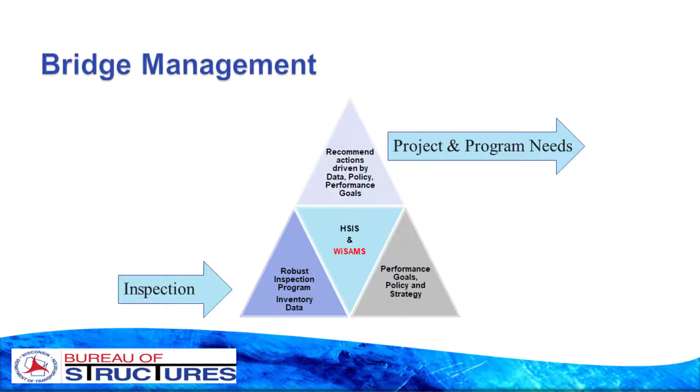Using the tools in-house, we have what we refer to as Highway Structure Information System, which is an in-house data management system we built to maintain our inspection data. It's also web-driven and interactive with our inspectors, so they can upload information during the inspections in the field. We also developed our Wisconsin Asset Management, WISAMS, to utilize that information and use it to forecast needs.

Ultimately, the goal is recommended actions driven by data and policy. So big picture is good inspection information yielding projects and program needs out of that program.

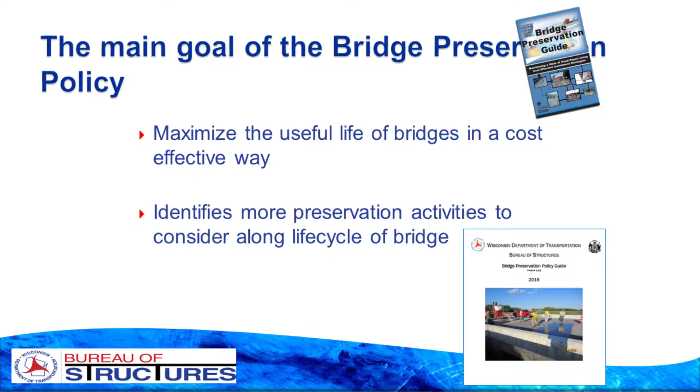Bridge preservation really is out to maximize the useful service life of bridges in a cost-effective way. One of our goals was to identify more preservation activities to be considered along the life cycle of that bridge, just not wait until we had a replacement issue.

In developing our policy, we utilized the Federal Highway Bridge Preservation Guide, but we also undertook a study and did elicitation of experts, both our internal experts, our bridge inspection engineers, as well as nationally. We did some outreach to many of you to talk about your concepts, and we brought that together into our bridge preservation guide.

So the main goals in the preservation policy are really applying the right treatments at the right time, optimal and consistent treatments driven by conditions and time. We wanted to create preservation-specific objectives and measures and identify preservation activities, the eligibility and needs to meet those objectives.

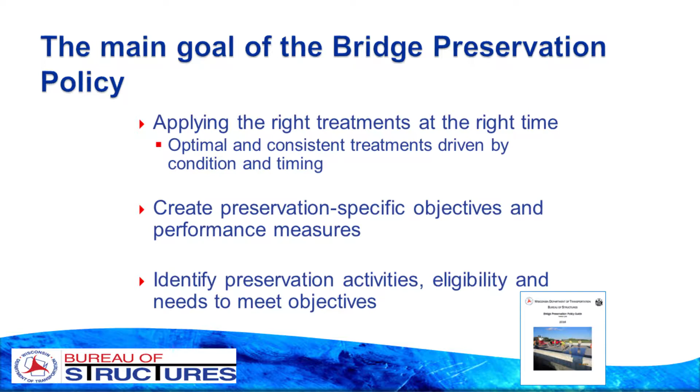As far as objectives and measures, in that policy we set out a number of goals and targets that we wanted to meet. The big global ones are to maintain our state bridges, 95% of them, in good and fair condition, as well as the decks.

Those goals also go down to the paint systems and the joints and other components of the structure, but those are the big ones that we shoot for.

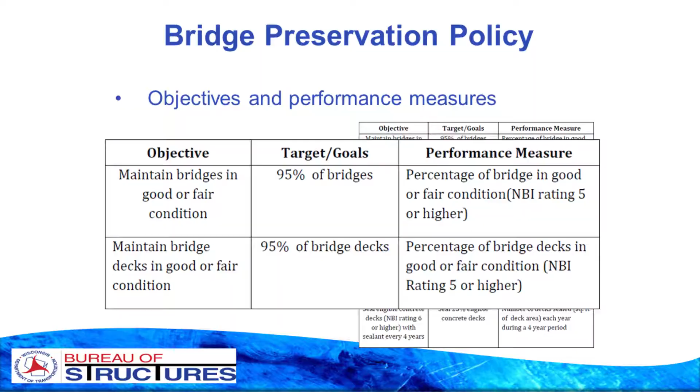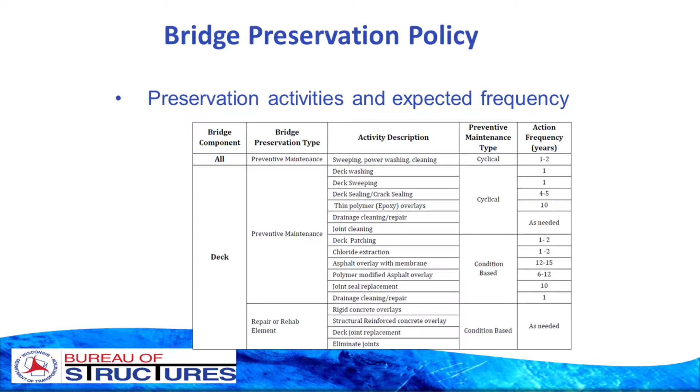Within the preservation policy, we have indicated activities and expected frequencies, and those are both cyclical and condition-based, and progressive in nature. We've got a number of tables that outline it, and it also talks about the application frequency or the anticipated frequency for those activities.

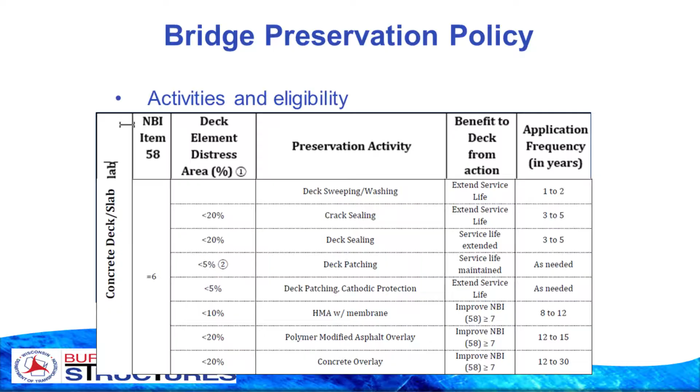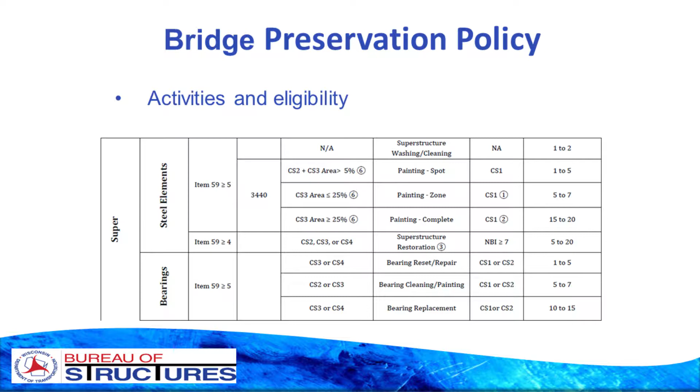We also get into the eligibility for those activities. We've all been collecting NBI information for quite a few years, and recently in 2015 started collecting the new element information. We've been collecting core element information for quite some time, I think more than 15 years. So our criteria are kind of a mix and match between NBI and element level.

We talk about the benefits of doing some of these actions, not just the criteria to do them, but the benefits and the application frequencies anticipated. And it goes through the super, sub, and the deck, super and sub.

We also get into a number of the other components, including bearings and painted systems or painted components in there, and we speak to the improvement to the element also anticipated from those actions.

So we've got an understanding now of what some of these activities might be and how to identify them. To us, the proof's kind of in the pudding as far as getting them into the program. And to get them into the program, we want to make sure that they're fundable.

Our next step in developing this preservation-based program was to revisit our Wisconsin DOT Federal Highway Preventative Maintenance Agreement. I believe all the states basically have a similar document to this. In 2016, we worked with our division office and made some updates to that agreement.

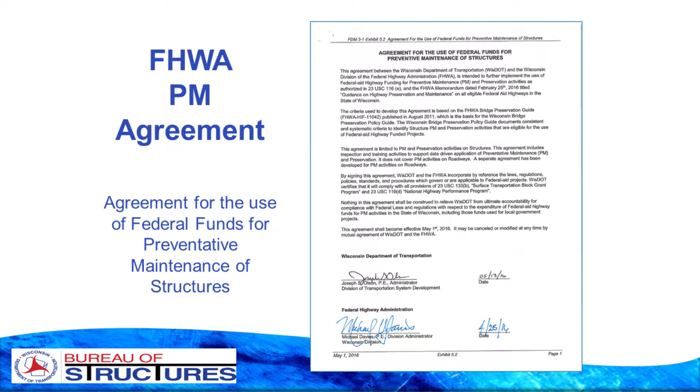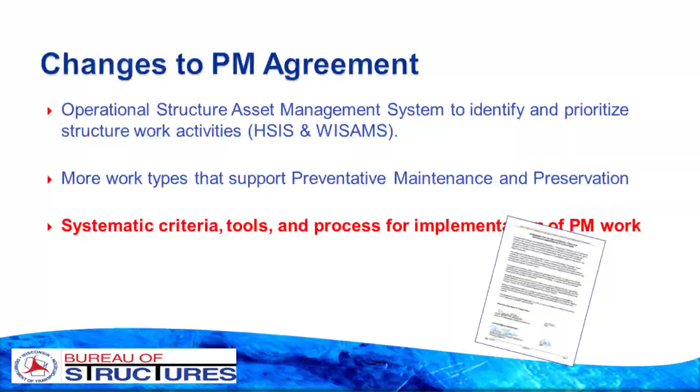The agreement now reflects the fact that we have an operational asset management system to identify and prioritize these various work activities. We documented more work types that support preventative maintenance and preservation as being fundable with federal dollars, and we really drove home the point that we have systematic criteria, tools, and process to implement this PM work.

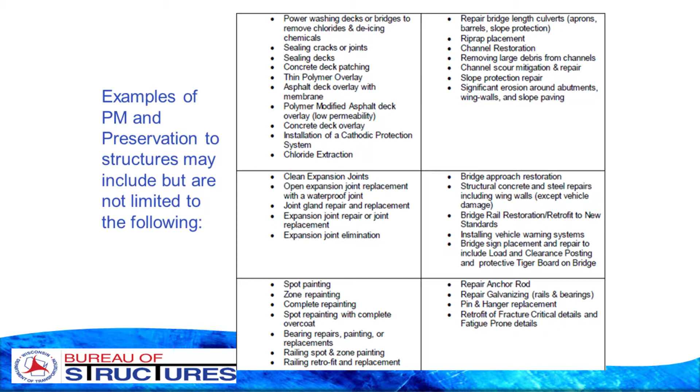Some of the work types within that agreement relate to the deck, various deck treatments, whether overlay, sealing, chloride extraction, things of that nature. Also joints, painting, spot painting, zone painting, and items dealing with the channel, the approaches, and other components on the structure.

These are not meant to be exclusive, but reflective of the work types that we've agreed with our division office in Wisconsin that are eligible for funding with federal dollars.

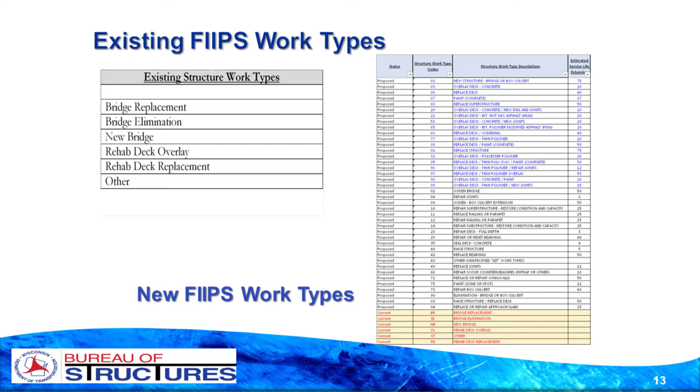The next step was to get them into our program. Historically in Wisconsin, when we identify and program work, these were the areas that we would identify for programming bridge funds, and they're quite limited. The other category here would be kind of a catch-all for a lot of stuff, so not very granular, not very descriptive of the various types of work we could actually do.

Extracting from the preservation policy and again working with our planning people and our regional bridge maintenance engineers, we came up with a much more granular, descriptive set of work activities that we would like to program, identify with our systems, and then program into our 6-year program of work.

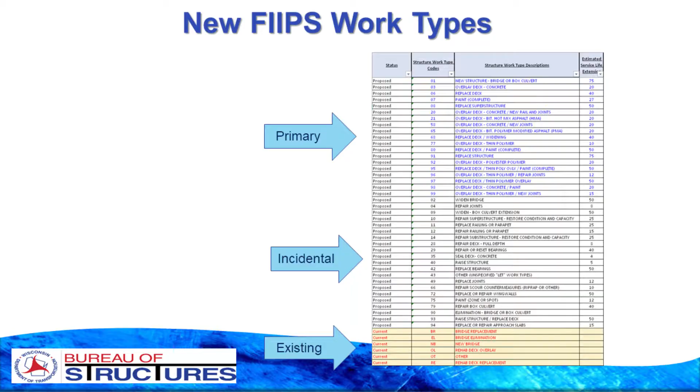We've got primary work types, which is everything from thin overlays to overlays in combination with joints or bearings and things of that nature, to deck replacements, to full bridge replacements, and other major work.

We've got incidental work items now, which on an individual basis would not necessitate a project, but are really good things to identify when you are programming a project.

And then our legacy items, in that we weren't going to wipe away our current 6-year program that's already in the process of being delivered. So we still had to recognize those legacy items.

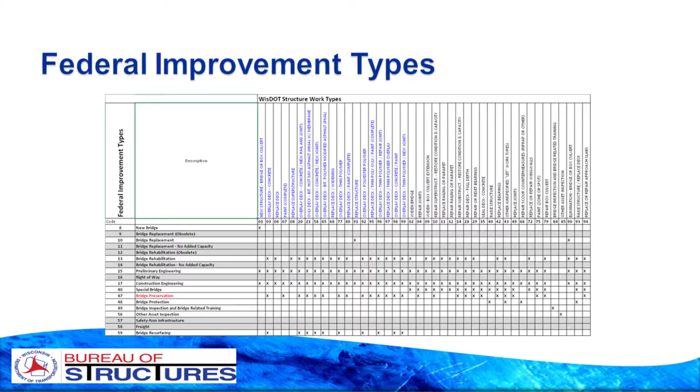We also coordinated with our division office to relate our Wisconsin-defined work items with the federal highway improvement types. This was to make sure that our financial system, FIIPS, could talk with the federal financial system, FMIS, so that we could ensure the flow of monies could come down through our projects. We felt that was very important to work out.

To look a little closer at our Wisconsin Structure Asset Management System, it's an in-house built tool that we've been working on for a number of years to determine optimal work candidates for improving conditions of structures and a whole bunch of other stuff that hopefully you can see as we get into it.

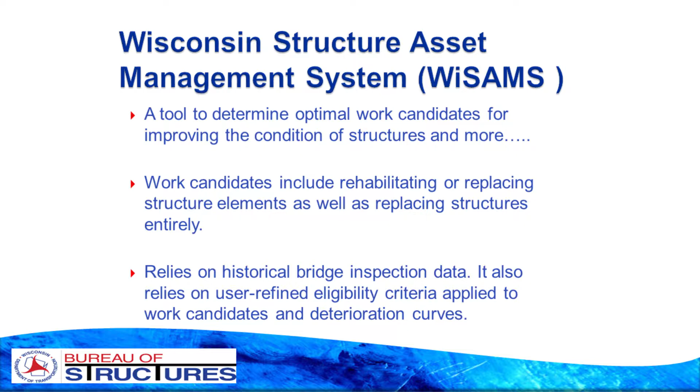Work candidates include rehabilitation, replacing structure elements, as well as replacing the structure entirely. It relies on historic bridge inspection data, also user-refined eligibility criteria, which began in that preservation policy but was refined in much greater detail and logic to actually become programmable work items.

We import data from our highway structure information system as well as our financial system and other storage locations, that's cost, deterioration data, and other things.

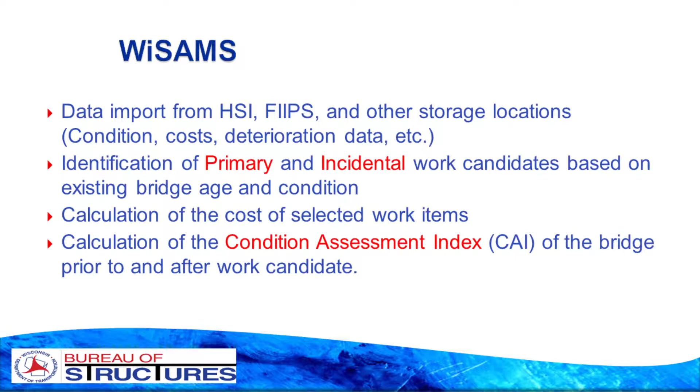We are identifying those primary and incidental work items based on the bridge age and condition from inspection. We can calculate the cost of doing those work items, and also we calculate a condition assessment index, which essentially is a health index for the structure.

We do deteriorate NBI values as well as some of the element values, and we did borrow some of the deterioration information on elements from BRM, so we appreciate the work of the builders of BRM.

We do analysis of the work types in our program to show the benefit of doing these works in that condition assessment, as well as our ability to calculate the criticality or priority of doing those work items.

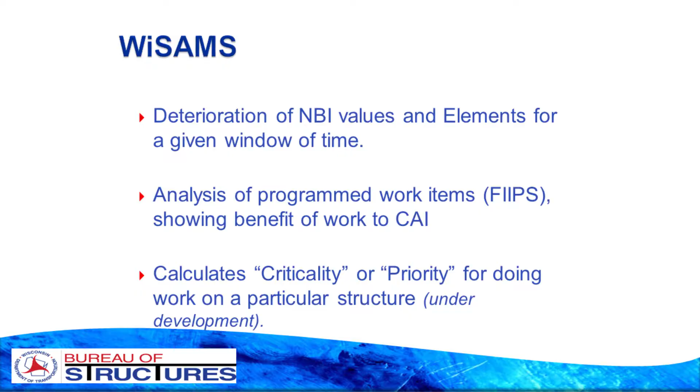So as far as identifying unconstrained needs versus what you can actually program, we're able to give recommendations there.

The Condition Assessment Index incorporates the deck, super, sub, culvert, paint system, overlay, joints, and bearings.

Now this, in my opinion, is kind of the heart of the matter here, and it is the work rules. Here you just have a snapshot of a few of them. There are about 50 work rules that we cycle through on a regular basis.

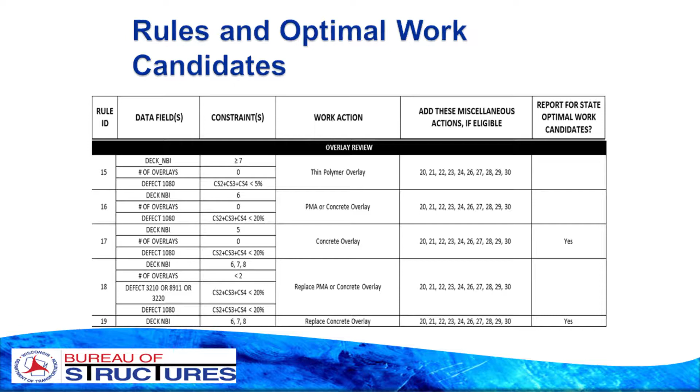Inspection information on our bridges is coming in daily, so it's not like once a year we've got a complete refresh of inspection information. It's progressively and always changing, but at least 3 times a year we run the routine, identify work items, prioritize them, and communicate that information to our regional offices and central office investment management people to identify good candidates for work.

What's going on is that we're running through the complete inventory of state bridges with this logic routine and literally picking out the items that need, or the bridges that need, work actions. That gets us to the point of identifying current needs, unconstrained current needs.

But we're also deteriorating that information on condition and age as we go forward in time, whether it's the deck, super, and sub, and also element level deterioration. As we mentioned, we borrowed from BRM.

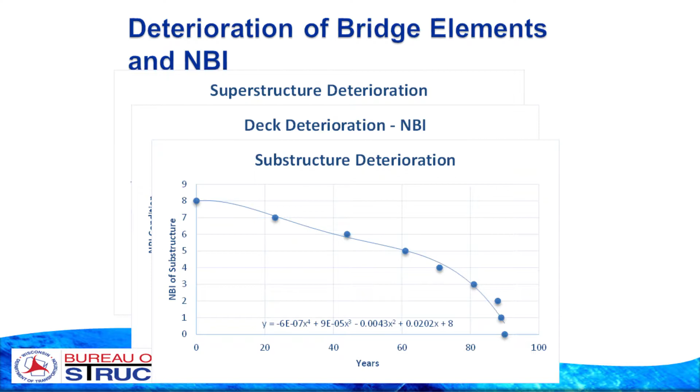And we also make recommendations on priority, and that is kind of a volatile place to be. It's a very easy thing to talk about in the context of just bridges alone, but truly in asset management, you're talking about your complete network of transportation.

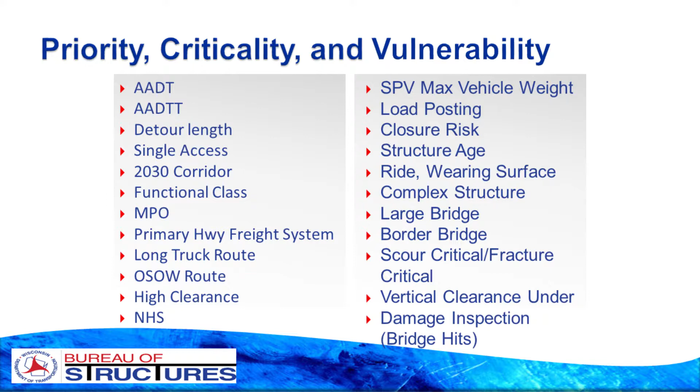You're talking about roadways, safety, and other means of transportation that you balance dollars amongst. As far as criticality, you can see on the left a number of the indicators we can draw information in on, as well as vulnerability on the right. So those items are considered in the identification of priority, but ultimately we need to work with our regional offices that actually program the work, as well as our central office DTIM that programs some of this work.

As we built this process, this mechanism and these tools, I was very concerned that when we came around to our regional offices with these recommendations, they'd perhaps tell us to get lost, that they had their own ways of doing things. But in reality, they were very welcoming and supportive of our involvement, support, and information, helping them program in a more systematic and consistent way.

We provide our central office DTIM, investment management people, and regional planners a list of optimal work types, the optimal year that work should occur in, and we program in a 6-year cycle in Wisconsin. I'm sure many of you have a similar planning window.

We show them the benefit to the condition assessment index. So if you do this work, what does it mean to the bridge? How does it improve that bridge and for what time? We give them information on the cost of that work and the incidental work items.

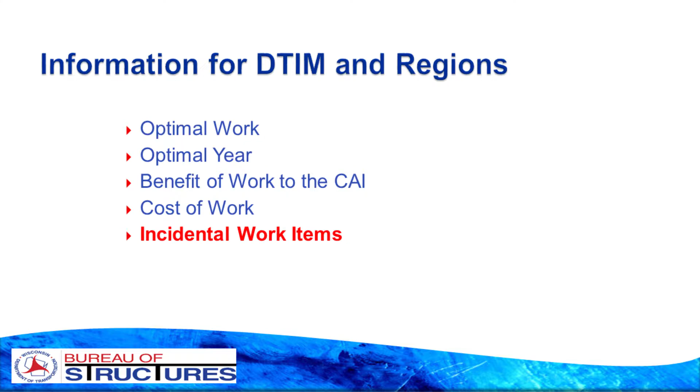That also is a priceless item. And I had the opportunity to take a break from bridges and actually work in our regional office for a number of years, managing or supervising the projects from concept through final construction.

One of the things that provided a great deal of program instability to us were the last-minute inclusion of work items. Whether it was from the financial perspective of asking for additional monies close to the letting of the project, or the agency coordination that would be required to do painting or something of that nature at the last minute. So identifying these incidental items early in the process during the programming side provides a great deal more stability and also efficiency to the delivery of the projects.

So the output that we give the regions comes in many different formats, but this is just one tabular format of it. So we give information on the demographics of the structure.

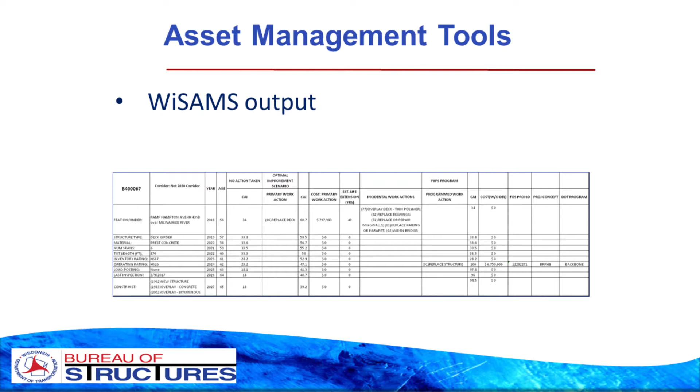Its size, all that stuff, some inventory and operating ratings, load postings, the last inspection date, but also information on its construction history, initial construction, and history of other work items that were done on that structure. And also you can see the age of the structure progressing as we go down here, as well as the year.

Now here we have the condition assessment index, and I don't think you all probably can see that, it's pretty small print. But what you'll see is that condition of that structure dropping in time if no work action is done. And if the recommended work action, in this case replace the deck, was done, the condition assessment jumped from 34 to 66.7.

And we also gave them an estimate of doing that work as being about $800,000 to replace that. So the condition is, if they do that work, the condition assessment jumps up and then it starts deteriorating down as we go through time.

And then also we're giving them the incidental work items that they should consider programming along with that deck replacement. Additional information we give them is some acknowledgement as far as, they've actually already programmed a bridge or a project, but here they're talking about replacing the structure. And they waited a number of years, and in fact it jumped the condition assessment up to 100%, and also to the tune of about $6.5 million. We give them a little bit more information as far as what the project ID there also.

So here we've got a little bit of difference in recommendations and application year of those recommendations. So ultimately what we're trying to do is advocate for what we would consider the most optimal work type in the optimal year.

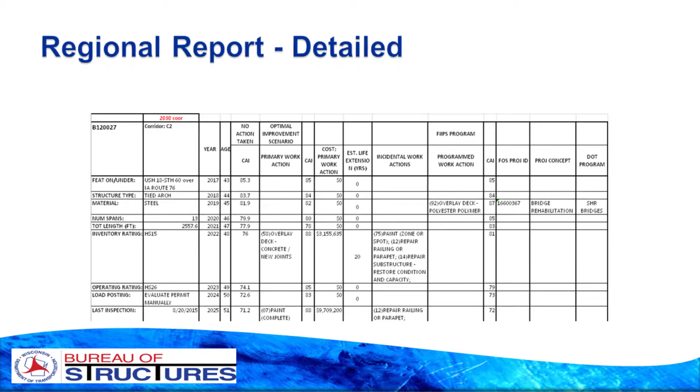So some of the other byproducts of doing this type of analysis for one of our region offices: since we're able to deteriorate and establish existing needs but deteriorate through time, we can start looking at potential projects in the outer years, whether it's within the 6-year window or beyond. And obviously as you get further out in time, it becomes a little bit more sketchy information.

Clearly, actual inspections and conditions trump projected deterioration. So as we get further out in time, it becomes a little bit less dependable, maybe a lot.

But what's nice here is in any given year, as we progress down in time for one of our regional offices, we can start to quantify what we would anticipate as far as cost, cumulatively, or the aggregate of the complete program, or we can describe it broken out into the types of work actions, and this table goes out much farther. But I think that's kind of a useful tool for them from a planning standpoint, and also to look at maybe graphically the different work types.

And this is going out to like 2050, so this is way out in time. But, whoops, let's back up. But you can start to look to see some vulnerabilities that you might have in time, and maybe the accuracy as we get way out there isn't quite right.

But you're going to start to see some trends in different types of work. Whether you built large segments of highways 30 or 50 years ago, or some other risk factor out there, it starts to appear in there, and that's, I think, going to be helpful from a planning standpoint, also from the standpoint of building strategies to go forward and try to mitigate some of that earlier.

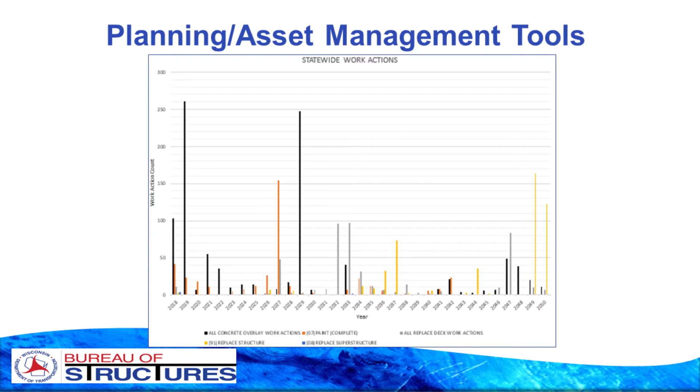Certainly if you've got a whole bunch of bridge replacements, perhaps, in this out year here, you're going to start asking, can we afford to do all that work in that time frame, or do we need to take some types of actions many years prior to that and get on top of that, or do we need to start working with our legislature to prep them, like we're going to have some big needs in 5, 10, 15, 20 years that you all need to help us find some money for.

So that's kind of beneficial. Let's look a little bit at some performance measure stuff. One of our measures that we're kind of toying with is structure eligibility and program effectiveness.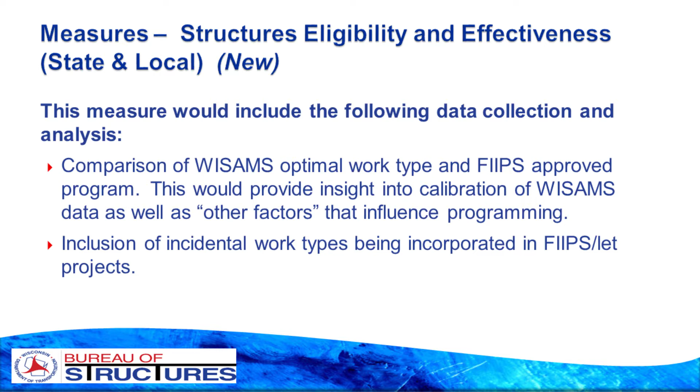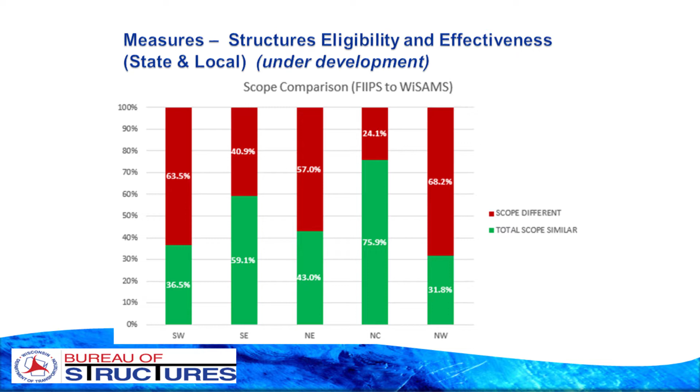And what that really gets at is, we're coming up with all these recommendations and providing and working with our regional offices to program this stuff. So how much of this stuff really is taking hold? And one way to look at it is, in each of these bars represents one of our regional offices. It's like, so does the scope that we're recommending for these already programmed projects, is that reflective of our recommendations, or do they vary for some reason?

So we're starting to do some analysis on that. And most certainly there's going to be variation for a lot more reasons than those that indicated the work action. For example, projects of opportunity, perhaps over a segment of roadway where they're doing a pavement replacement, it makes sense for them to do work actions on certain bridges to make sure that they can utilize the efficiency of the overall project on a specific bridge or something of that nature.

So, we're trying to be smart about this and realize it's not all about our bridge data. There are other factors that come into the programming and funding of these projects. But one of our goals might be to maximize the agreement or the consistency between our recommendations and what is actually getting programmed. Also, the timing of the projects.

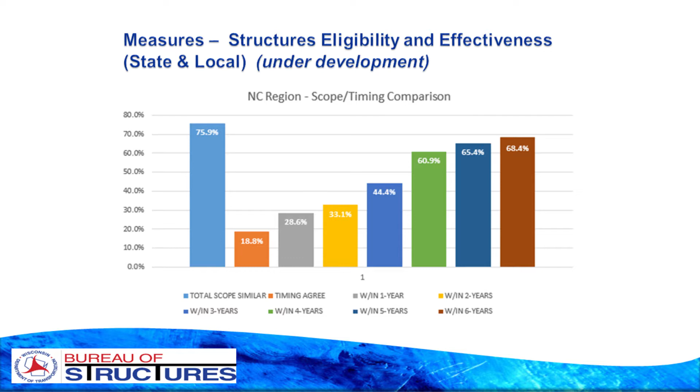For a given region, perhaps, maybe about 76% of the projects are consistent as far as the scope. But how about the year that they're programming that in? And at some point in time, because of the deterioration of the project or the structure, that recommended work action may no longer be viable.

Whether it be a rigid overlay or something of that nature. Perhaps they let the deck go too long and now it's a deck replacement or a bridge replacement. So we're looking at measures like this to help us understand, are they able to program within the windows we need those work actions to occur?

Going all the way back to our preservation policy, we had a number of targets in that document. One was to maintain the bridges in good and fair condition - our goal was 95%, and for our state system we're about 96.8%. Another was coated steel surfaces in condition state 2 or better - goal was 90%, and we're pretty much there.

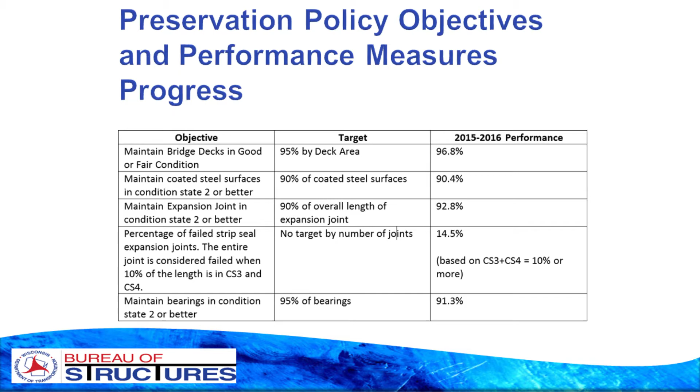One of our learning experiences was maintaining expansion joints in condition state 2 or better - 90% of those. On the surface that seems like a good measure, but what if 10% of every one of your expansion joints is in condition state 4? All your joints are failed. So that's probably not the way to look at it. We started toying with looking at the amount of each joint in a particular condition state - that was one of our learning experiences.

Also with our bearings, we wanted 95% of the bearings in condition state 2 or better. We're about 91.3%, so we're below that, but we're not terrible there. We can clearly see that might be an area where we want to put some emphasis.

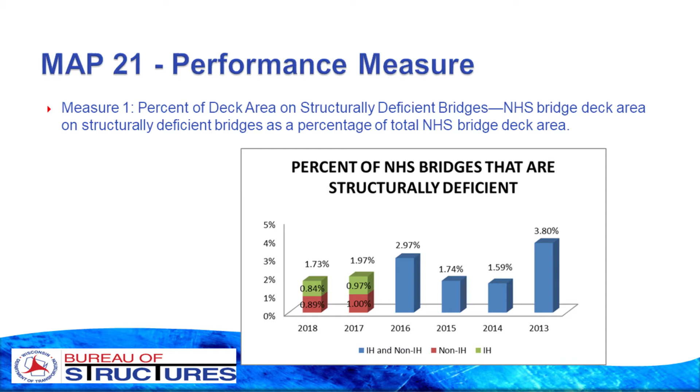As far as our MAP-21 performance measures, all of us are tracking these now. In Wisconsin, as far as the NHS, we're hovering about 1.73 as far as deficient bridges on the NHS, and we're doing pretty good there.

So that's what I basically have today. Back at Wisconsin DOT, these are a number of our engineers that have worked on this system. There's a lot of complexities to this, whether it's in the programming or other things, so this is most certainly a multifaceted team approach, but it is yielding results.

It's a very homegrown, modular system, as I hope you took from this presentation - we built components of this, all getting us to the point that we can make recommendations and help identify and program activities that support preservation of our infrastructure. I think so far we're doing good. We know there are more sophisticated tools out there like BRM, and what we've built so far, maybe at some point in time we're comfortable enough with the development of BRM that we port all this right over and keep moving forward. But currently, this approach meets our needs of working with our regions.

So that's pretty much all I got. Okay, any questions? Anybody? Just a general question.

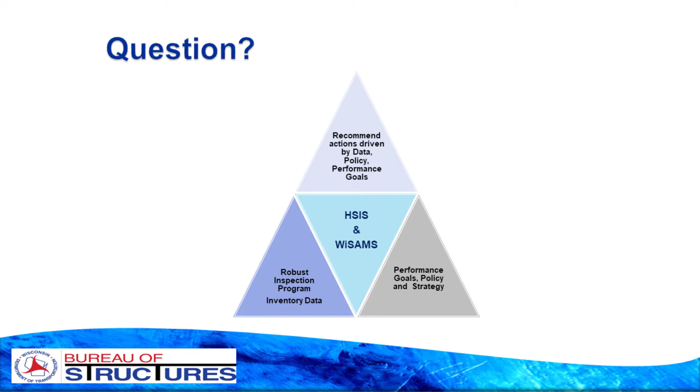Is your system in general format out, maybe on the Wisconsin DOT website, so it could be looked at by other states? Our highway structure information system, our data management, yes - all of you can get access to it and run reports and examine that. It's a really nice system, it's web-based. That's what our inspectors are using, and people can query information on individual bridges. You can call up the bridge plans and all of the inventory data associated with the bridge.

Is your WiSAMS system a spreadsheet-based program, or is it a higher language? And if it's a higher language, how did you find engineers that can do that? That is the hundred-thousand-dollar question right there. And no, it is not spreadsheet, it's database. We do have an engineer that is a programmer and highly experienced.

This is an area that I do not have a lot of experience with. My boss, Scott Becker, the director of our Bureau of Structures, is a programmer, and he in fact was the originator of the Highway Structure Information System - I give him tremendous credit for that. At this point, you find these individuals and you give them the freedom and the support to create, and that's what we've done there.

Do you try to align your bridge work with your pavement work? Is there any correlation between them, or do you do separate work? As we looked earlier at some of the variation of why we might not be matching up, that would be one of the drivers. In all honesty, a lot of the bridge work in our state, and most likely in your states also, is being driven by opportunity when they're having the larger pavement projects. Not all of it, obviously - there are a lot of standalone bridge projects, but often the pavement projects do bring the bridges along with them for programming purposes.